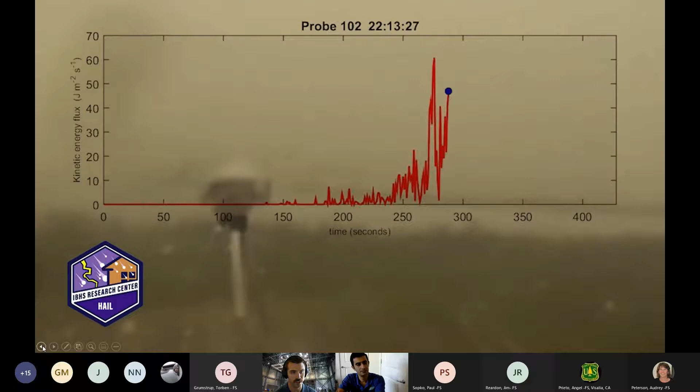Thanks. So we're streaming video over Teams, which is always dangerous, but this is giving you a fly-through of the IBHS Research Center, located in Richburg, South Carolina, just south of Charlotte. And this is a video showing some of the different perils that we look at, including hail, including wildfire, which Faraz and I both work on closely and will be the focus of today's talk.

Rain, and particularly wind-driven rain, as we commonly see during hurricanes, but other wind events, and then also high wind. And so again, this can be hurricane or this can be tornado. We call these our core 4 perils that IBHS looks at. We look at both residential and commercial.

In the test facility, which we'll talk more about, we can put a full-size structure. And in this case of a wind test, we blew the roof off and out the back apron. Not exactly what we expected, but aligned with the stuff that we're capable of doing. Hopefully the streaming video was sufficient enough to give you some visual sense of some of the pictures we'll be showing you later.

Moving along to our why statement, and again, I maybe could have mentioned this at the top. IBHS, that's the acronym for the Insurance Institute for Business and Home Safety. We're a nonprofit organization. We receive our funding from the insurance industry, particularly the property insurance industry. Our members include primary carriers as well as the reinsurance carriers, and then those affiliate members, companies that support the insurance industry, like Insurance Tech.

And really the focus is on property and how it is impacted by severe hazard weather events. Going back to the core 4 perils, we primarily look at hurricane type events, wildfire type events, and severe convective storms, which generate the hail. But as a nonprofit organization, we have a very centered why. Go back one, please. Our CEO Roy Wright came from the FEMA flood program, and often talks about understanding and focusing on our why, and creating a why statement. And so this is ours right here.

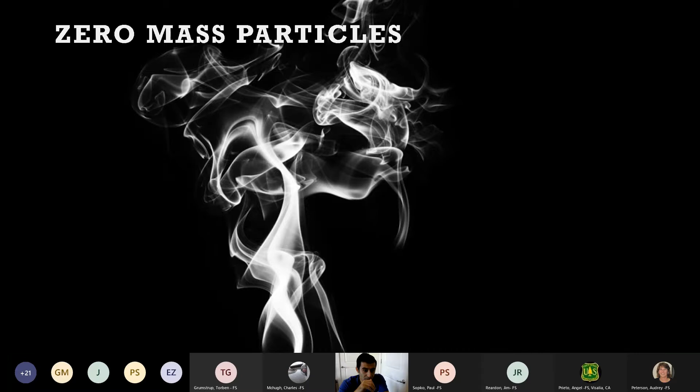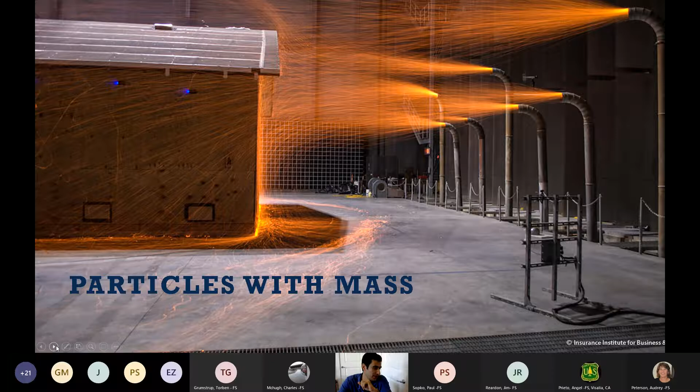So I want to double click on these two, and how we create that wind in the chamber. If we want to create constant wind, we can apply different RPMs to the fans. At the same time, we can read the velocity at a certain distance in front of the fans, and it's a linear line. So we can create that line, and then if we want a certain wind speed, we can do it backwards. We look at the desired velocity, find the RPM, feed the fans with that RPM, and create the wind that we want.

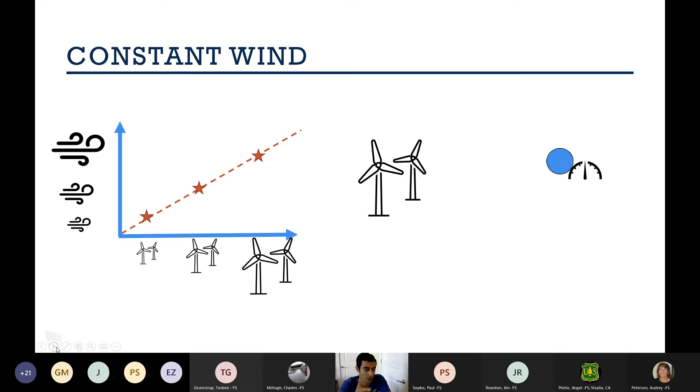So basically, if I want to animate that, a control volume of air, let's say, leaves the fans, and then we can measure it as it gets closer to the probe, at the location of the probe. When we are talking about gusty wind, it's a different animal, right? So we have dRPM/dt.

So when we ramp up and ramp down the fans, the control volume that we talk about is not going smooth. So it's like there is a push and pull between the control volumes. So when the control volume leaves the fan, as we ramp up, the next control volume pushes it forward, and as we ramp down, it sucks it backward. So there's always inherent noise in the measurement.

And this inherent problem makes it very challenging to create a desired time history of wind, even something as simple as a sine wave. If you want to create a sine wave, it's a trial and error thing. So with different frequency and amplitude of the sine wave, we can play with the fans to create that. But a real wind is not a sine wave, right? So it is a combination, let's say Fourier transform, combination of these different sine waves to create that desired time history.

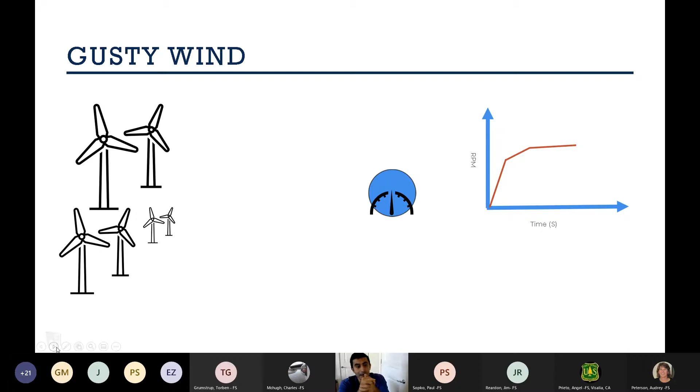Another layer of complexity to that is that the fan curve is not a linear thing. So we can go from, let's say, 200 RPM to 1000 RPM in a quarter of a second. If you want to build on top of that, going from 1000 to 1500 takes more time. And then from that to the maximum fan, which at IBHS is 1900, 1800 something, takes more time. So all of this makes it very complex to create a desired wind history.

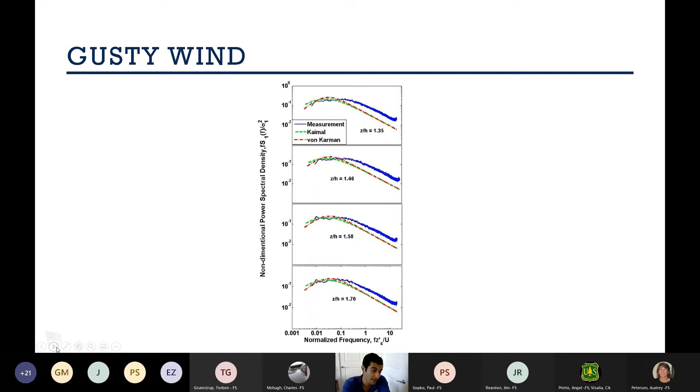But when we come to the lab, how can we create and put all of those right gust structures at the same time to create the right energy spectrum? And that energy spectrum causes the right distribution of embers. So for constant wind, we could use a deterministic approach, right? But for gusty wind, we cannot use that model anymore. We need to go to stochastic models.

If I know x1, in our case RPM 1, let's say 300 RPM, and I want to go to another RPM, how can I do that? So if I fix x1 on this curve, I have a probability density function for the next one. So if x2 has a higher probability, I can predict it. And if it has a lower probability, I can also predict that. So at the end of the day, I end up with another normal distribution. And we can build on top of this, go to 3D, 4D, and all the way.

So at IBHS, we thought that fan curves, velocity and its derivatives, temperature, moisture, relative humidity, all of those could be predictors in our models. So we're talking about a 5-dimensional probability density function. With slice 1, we find the 4-dimensional probability density function. We slice that again, and then we get to the final RPM. So with this technique, which is again Gaussian process,

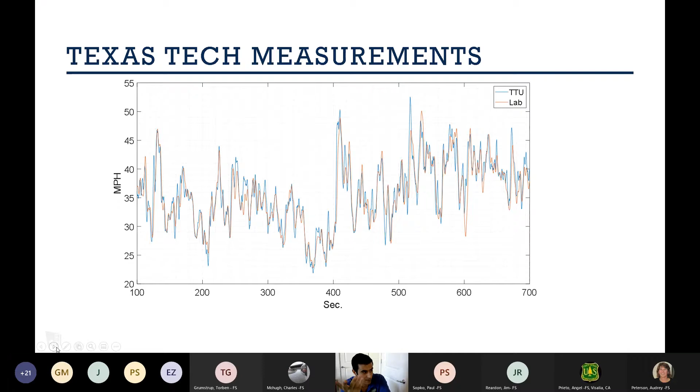So taking this into another measurement, Hurricane Florence: the mean wind speed here is probably 35 miles an hour. Here we're talking about 75, 80 mile an hour wind. So this is like the higher RPMs, the higher ends of the fans' capabilities. And again, we lose more peaks and valleys here because the fans cannot ramp up and down the way that we want. But at the same time, we can create the right gust structure that is required to create the right ember distribution.

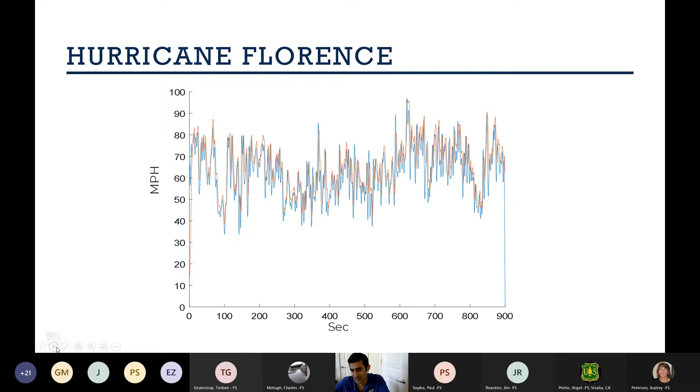And we made a proposal to our member companies that if we want to make it even better, we need to replace the fans with stronger motors. Going back to where we started, we talked about how we could create the right gust structure. About the ember generators, we are working on this. This is an active project.

The ember generators, I guess, started back in 2009, 2010. We used the NIST design in the first generation, and then Dr. Steve Quarles built on top of that. And three generations later, this is what you see here. We have a distribution of embers which is closer to the real embers, but it's not there. We are still working on it and on different designs to create the right ember size.

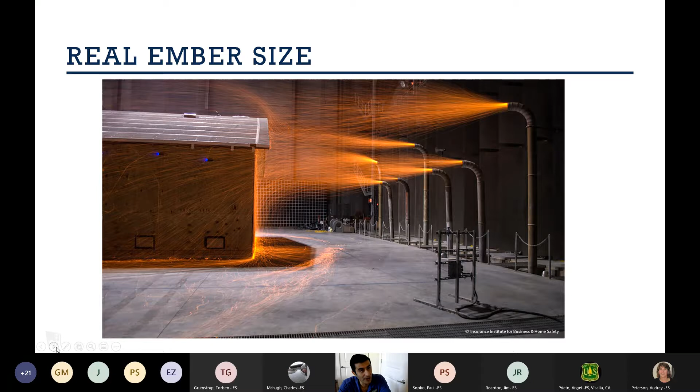And when we put these two together, we can estimate or predict ember accumulation at different areas. This could be a building, this could be a tree, this could be smaller shrubs. All of those, in my opinion, come down to the interaction between wind and the inertia of the embers. So talking about finding the right ember accumulation point, there are some other avenues that we also work on, which is machine vision.

So this is a top-down view from the catwalk. Those are the ember generators, and on the top, you see the building. As the embers get closer to the structure, you see the vortices do their magic and disperse the embers, right? And you see all of those vortices, and this is the optical flow. The background is stationary, and then we can do optical flow measurements here to get the ember distribution.

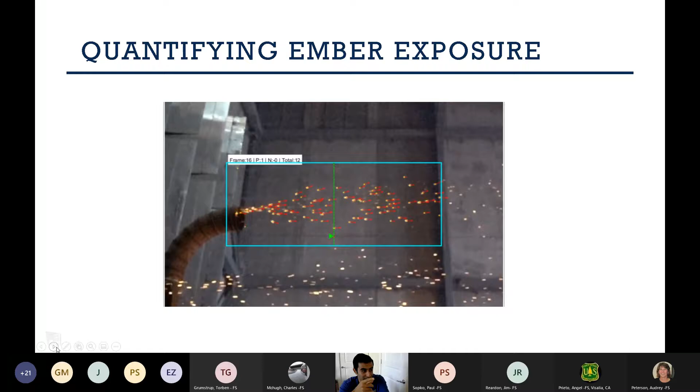I want to look at the ember generators first. When the embers leave the ember generator, we can count them. How many of them are going in the positive direction? Positive is when they get closer to the building. So on that frame number, positive, and then negative is 0. And then the total is just a counter, right? So we can count it.

But as we get closer to the building, the embers are pushed back by the vortices. And you see those red arrows: if the velocity vector points away from the building, that's negative. If it moves forward, that's positive. And we can count it, and here is the result. At about 15 feet from the structure, almost all the embers are going towards the structure. At about 5 feet, let's say on average 40% of them are going the other way.

So if we want to create a statistical model, or we want to harden the building, we don't need to over-engineer it. We can actually have more freedom, right? And if we want to quantify it from the modeling perspective, in my opinion, 60% of the embers is what you should be worried about, and not all 100% of them, because they don't hang around.

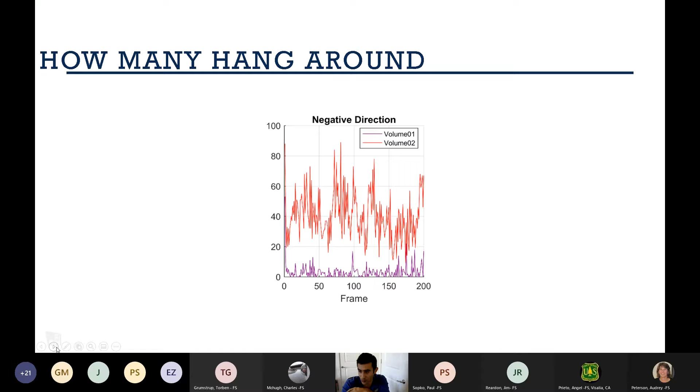And this gets another layer of complexity when the vortices do their magic at the corner of the building, where you see it's even worse. In this case, almost 70% of the embers do not hang around near the structure. They move away, and obviously because it's at the corner of the building, they go the other way, right? So this is another interesting thing to me. When I analyzed the videos, that was the aha moment for me, that this could be a viable technique.

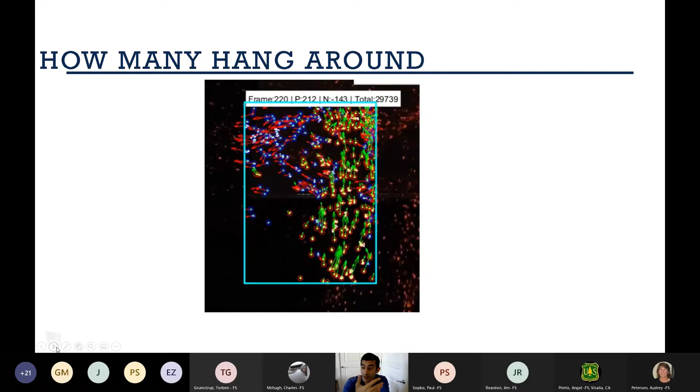A critique here is we are projecting a 3D domain into 2D, so we are losing a lot of information. The next step could be taking this into 3D and tracking in the 3D domain, which I guess NIST started; actually they released their first product maybe last year, very recent. And that was good news to me.

So yeah, we talked about embers. Embers accumulate at a certain part around the structure and ignite, and Dan will talk about this experiment that you see here later on.

This is a structure separation experiment that we work with NIST. We ignite sheds, ADUs, accessory dwelling units, and a full structure, and we see the flame behavior. So let me play this video. This is a no wind condition, and we see the flame height and the flame tilt angle from the normal direction. And you see, for the most part, the variation is not that much, right? After 2 minutes, we added wind, a 20 miles an hour wind to the same fire.

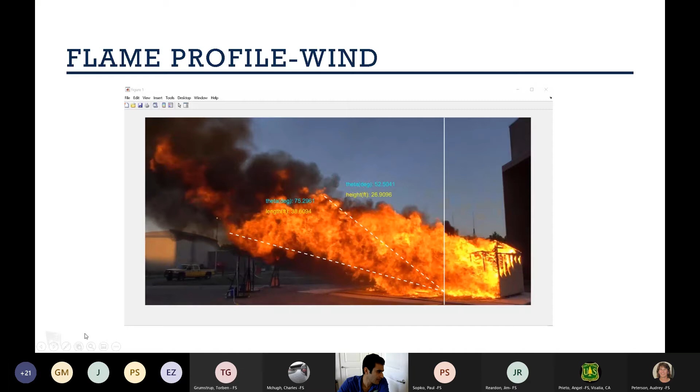And let's see if I can play this video. And here is the result. So the flame height and the flame length, we're tracking them. And we see the correction factor when we add wind is 2. So if you look at this, at no wind condition, the flame height average is, let's say, I don't know, 18 feet, plus minus a value, the standard deviation that you see. And the angle is about 0. When we add wind, again, the correction factor is 2.

And this is something that we want to work on to understand it better, because estimating heat release rate and everything with wind is extremely challenging. So I think optical measurements could be very useful here to understand flame behavior and the effects of wind on heat release rate. So with this, Dan will take it back.

Yeah, and hopefully my connection's a little bit better here.

Thanks, Faraz. And so, with that as context, where Faraz talked about the hazard side of this, I'll talk a little bit about some of the previous and ongoing work that we're doing right now to understand how the natural hazard, the wind, and the thermal impact from wildland fire, in this case the flame and the embers, can impact buildings. And in our organization's name, business and home safety, we can lump commercial structures, businesses, and homes, residential, into a category of buildings.

And so what we'll talk about here is looking at single family homes. So these are going to be residential, but I think the vulnerability aspect, which I'll describe, can be generalized also to commercial, thinking about the building as a system of components. So now I'm going to highlight 2 of those systems here. One will be the through roof vents, and the second will be the decks, where we've looked at specific vulnerabilities of those components, like here with the vents. We know those embers that Faraz was talking about.

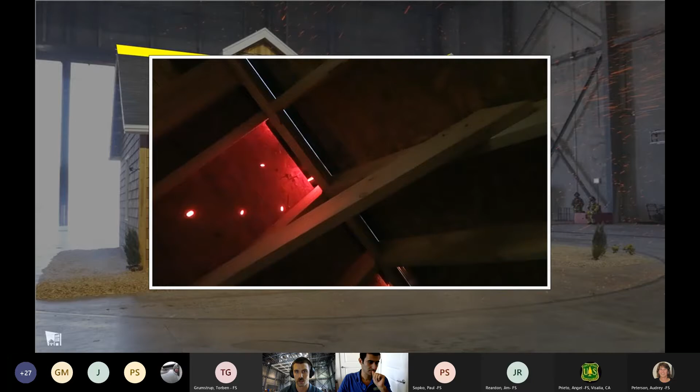And unsurprisingly, the finer the mesh, the smaller the opening, the smaller the ember size it allows through, or the better the filter is. Now, you still get some embers inside, but the end result is a smaller ember, as Faraz was talking about, that mass as you think about it as momentum, and also as essentially energy. Smaller embers are likely to have less thermal energy or capacity and are less likely to ignite something. So vents are important, but we can mitigate them. We can use that mesh screen to reduce embers from getting in and igniting something.

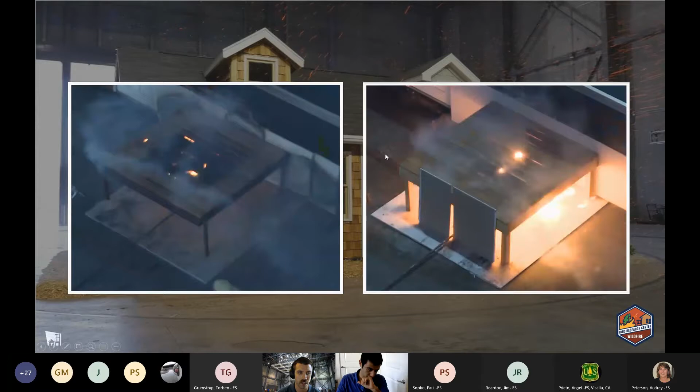Another component that we look at is the decks. Now, decks aren't on every structure and are probably more common on residential than commercial. But decks are a bit different than vents, and this is a sped up video. On the left-hand side, you have a wood deck with a metal substructure, and on the right-hand side, you have that same redwood walking surface, but a wood structural support system. What we're trying to show here is that a deck is not just a deck. It's what the deck is made of.

So not only is a building a series of components, the roof, the vents, the eave, attachments like decks and pergolas, each of those components can be assemblies in and of themselves. And so we can really dive deep into understanding the top surface of decks and their vulnerability. But really, we believe at IBHS it's important to consider the building as a system.

And so, Faraz, if you're able to start this video, this is a demonstration, and what we have here is essentially a duplex side by side. We're using the same ember generators that Faraz was just talking about and characterizing. And in this duplex, we're trying to show two homes as a system.

On the left-hand side, where you see the flames, we have combustible mulch in that first 5 feet, which we know is really important. We also have combustible siding, single pane window, and open eaves. On the right-hand side, which is experiencing the same ember exposure, we have rock mulch, or non-combustible, in that first 5 feet. We have non-combustible siding, multi-pane windows, and enclosed eaves.

And so this is just 60 seconds from the clip of the demonstration. You can see the full demonstration online. This is about 7 minutes after the start to give a sense for when those embers were able to ignite. But we see here in under a minute, the fire can pretty rapidly spread from that ignition in the mulch up through the siding. It breaks the window, so it can enter the home through the window. It gets up into the open eaves, and there is ventilation into the attic in that gable end side.

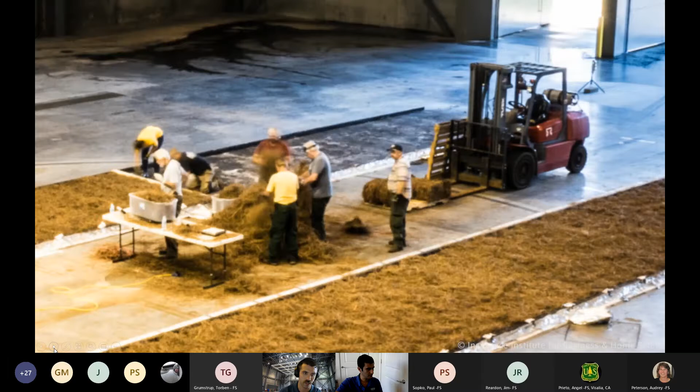This has generally been the past. You see some familiar faces here, and I see them on the participant list. This is from some 2016 testing with you all, the Missoula lab, our Forest Service collaborators, and we're looking at fire spread through pine straw beds. And so one of the notable things here, for those of you that have been to or know the Missoula lab, look at the wind speed. So 17.5 miles an hour is near, not at the lowest, but near the lower end of the wind speeds that we looked at. Faraz talked about doing wind speeds up to 70, 100 plus miles an hour. Those are very common for hurricanes, but for wildfire at those wind speeds, you're essentially blowing it out.

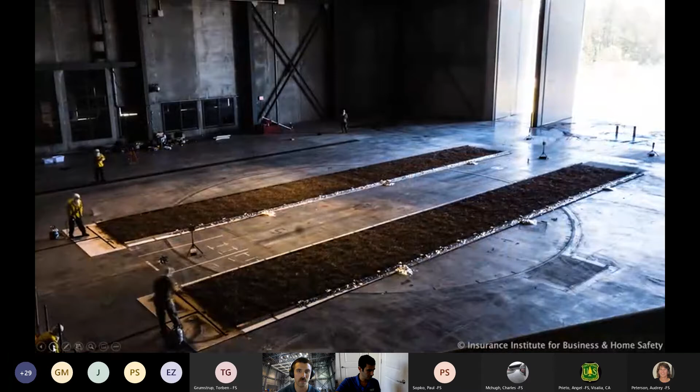And so one of the things that we've been working on over the past couple of years, in the same way that we try to understand the hazards of hurricanes, is trying to understand the wildland fire hazard. And this is an area where we really see potential and have got a lot of benefit from thus far and look forward to in the future, using the facility and our capabilities to understand this wildfire hazard. So this is just fire spread in a continuous fuel bed.

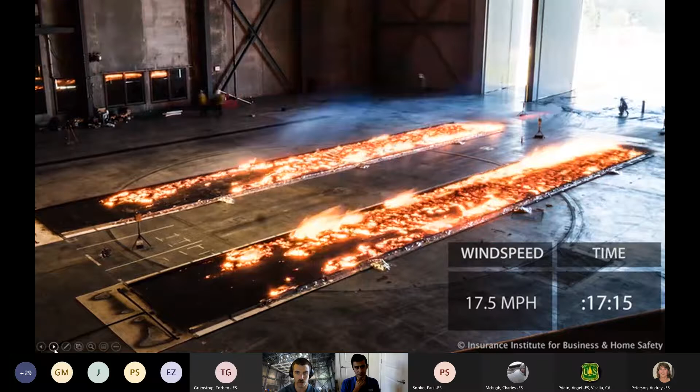Earlier this year, several months ago, some of you were out at the facility. We were looking at fire spread through discontinuous fuels, and so that's increasing our understanding there fundamentally, and then practically to develop tools. And then ultimately, it helps us at IBHS again. If we're focused on the homes and the buildings that can be impacted by the hazard, we need to understand more. We need to understand the fundamentals that Faraz was talking about and what's going on in that hazard to then focus in and see how it impacts the homes and communities.

Another ongoing project that Faraz showed is burning sheds. This is an aerial. In those burning sheds, you saw just a shed there in the center of the frame. This was not during a fire test, but we'll eventually get to this point, and this gives you a scope of what we're doing here. What we're trying to do is better understand the separation distance between structures, and really what that needs to be, or rather at what separation distance is the potential for this burning shed, with the wind at its back blowing those flames, as Faraz showed, up to 40 feet, to impact that target structure. This is your home in a suburban community.

How far do those sheds need to be away? I think we can pretty commonly understand the larger the shed, the more flame volume, the more flame potential, the more fuel loading in it, the farther that flame is going to reach. And so we're looking at different size sheds from very small, think closet-size things that you can have right up against your home, to more typical, where you'd have your lawnmower, 8x8. And this here shown is a very large. And so this is a really big project.

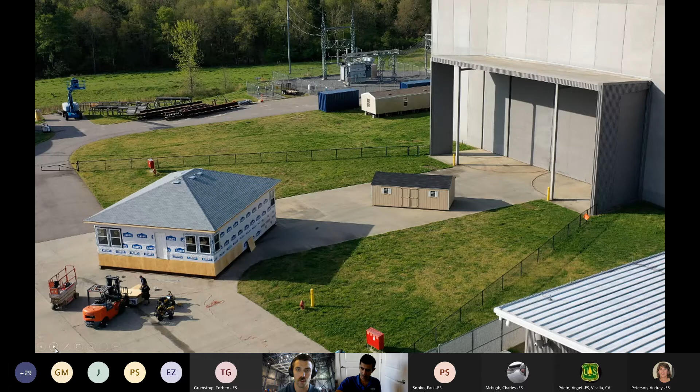We can burn a lot of sheds, and that's one thing that we're good at. It's really exciting. But if we go back to that core value of real world impact, we don't want to need to be in a position that we need to test every possible configuration. So again, this is an area where, I know Natalie wasn't able to be with us today, but she was the one that invited us to speak here, because we really want to leverage those of you that have modeling backgrounds and do some of the simulation work to both help inform, but also build upon the experimental work that we're doing.

So with that, I will go into one slide here. I think that this is something that we just want to plug to make you all aware of. I talked about some of the previous research that we had done on individual components, but acknowledging the home as a system. One of the things our members, the insurance industry, and generally people that live in wildfire prone areas or where their homes and communities are vulnerable to wildfire, are asking for is, well, how do I make my home wildfire resistant? And I think, with research over the past few decades, including from Jack Cohen at the Forest Service, our predecessor, Steve Quarles, and many others, we have a general sense for the important things, the components of the building that are vulnerable and the best things that you can do to harden them against that.

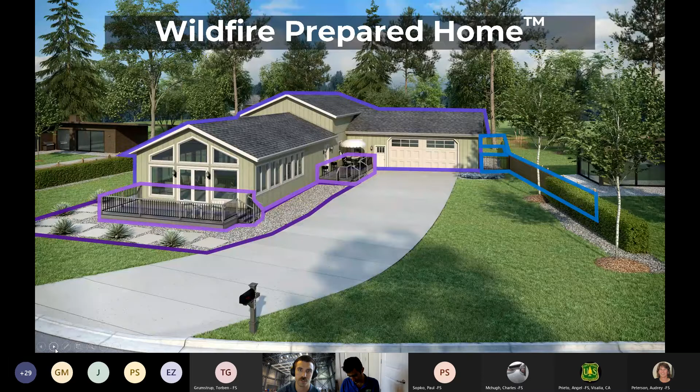One of the challenges then becomes, all right, I know how to build new, maybe what I would consider the most wildfire resistant structure, but what about the millions of homes that are existing in communities right now that have either been already exposed or likely will be in the near future? And so IBHS is working on what we're calling our Wildfire Prepared Home program. It's not the same, but is in some ways similar to our Fortified program, which is a designation program that the insurance industry uses to acknowledge structures that are built to be more resilient to the hazard.

And so the Fortified program builds on the science that we have from hurricane research and high wind research to have a continuous load path of a structure, a fortified roof that's going to resist those shingles coming off, and if they do, water from getting inside, which can be a big damage factor. And Wildfire Prepared Home builds on that same methodology to think about how do we designate structures that are more prepared for a wildfire. And so, Faraz, if you can give me a click to talk about some of the components here.

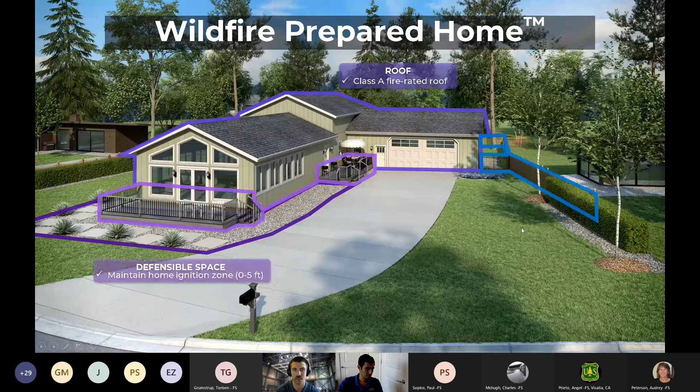We know that the roof is important. So Class A fire rated roof, this is something that, again, we get questions about all the time. There are so many things I need to do to my house. I know the roof is important, so I should replace my roof with a Class A roof, which I would agree with is true. But this worst case scenario that we have so many wood shingle roofs out there, that is probably a worst case scenario.

But with some of our partners, we know that in California, which is where we're primarily focusing on rolling out Wildfire Prepared Home initially, more than 90% of the existing homes already have a Class A roof. And this is based on the reality that the majority of homes have asphalt shingles, and an asphalt shingle roof is already Class A. So that's a big important thing, but hopefully it won't be too much lift because we believe most homes will already have a Class A roof covering.

Other building features like the vents that we talked about, we know embers are going to get there. We need to resist them from getting inside the structure and igniting something there, as well as little features like at the base of the wall. Go back one, Faraz. At the base of the wall where the embers accumulate, where Faraz was talking about. We have a lot of other things. We'd love to see non-combustible siding throughout, but particularly in that lower 6 inches where those piles are going to accumulate, making sure that's ember resistant.

And then other things around the structure. I think many people are familiar with the concept of defensible space or near building landscaping. So we talk about, again, that first 5 feet being critically important. We talk about decks, that deck research that we had showed looking at the support structure of either a common wood support structure or a metal support structure. That's really most vulnerable to that underdeck fire scenario.

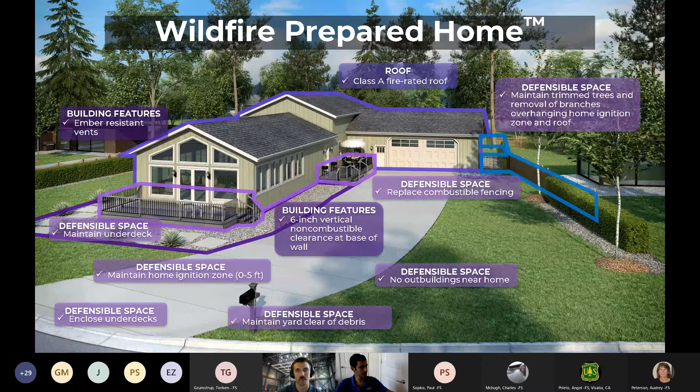So just so people are aware, again, I know Jack Cohen, who's retired now, did a lot of the home ignition zone stuff, and I'm not sure if other people on the call are looking at that, but that's very much an area of the research that we're looking at and wanted to make you all aware of that if that's something that you had thoughts on or wanted to learn more about.

And then as a final closing thing here to talk some about what we as an organization do, not just in the research and the research communication space, though that's very important. Again, building on that real world impact phrase, we do participate in other arenas and, I think what's generally known as the policy arena. So in codes and standards, we participate in standards development through ASTM and UL and others. We participate in development of model codes, including at the ICC and NFPA, as well as state codes. And again, I think California is a gleaming example, is really leading the pack in this space and their state building code that addresses exterior wildfire exposures.

But also, it's not just what we put the words on the page, it's coordination and collaboration. We talked about the collaborative research projects that we have with the Forest Service and others. Looking at state agencies and national and international partners. So hopefully that's a good segue as we're finishing up the presentation here to get into some good discussion with you all for what we've done in the past and what we can answer and provide more information on. If it's not clear, Faraz is probably the most technical of the two of us, but together in tandem, we work very heavily in this space, but also what we can and will be doing in the future and how we can best leverage the strengths and capabilities of IBHS with those that you all have.